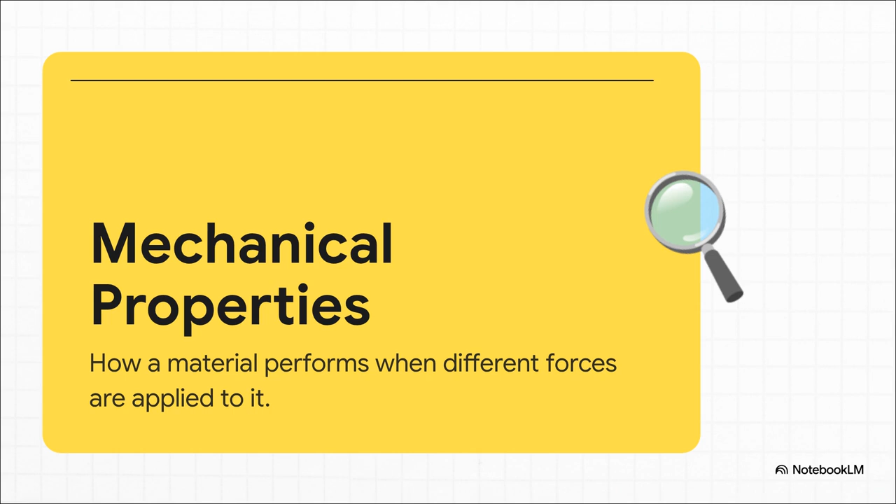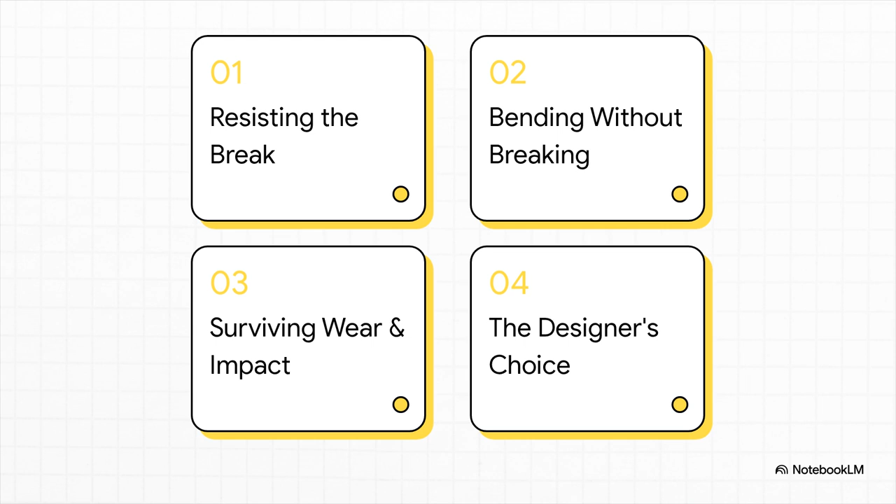So to really get a handle on this, we're going to break it down into 4 parts. First, we'll look at what it actually takes to break something. Then we'll get into how things bend and change their shape. After that, we'll see how materials survive all the wear and tear of daily life. And finally, we'll see how designers and engineers put all this knowledge to work.

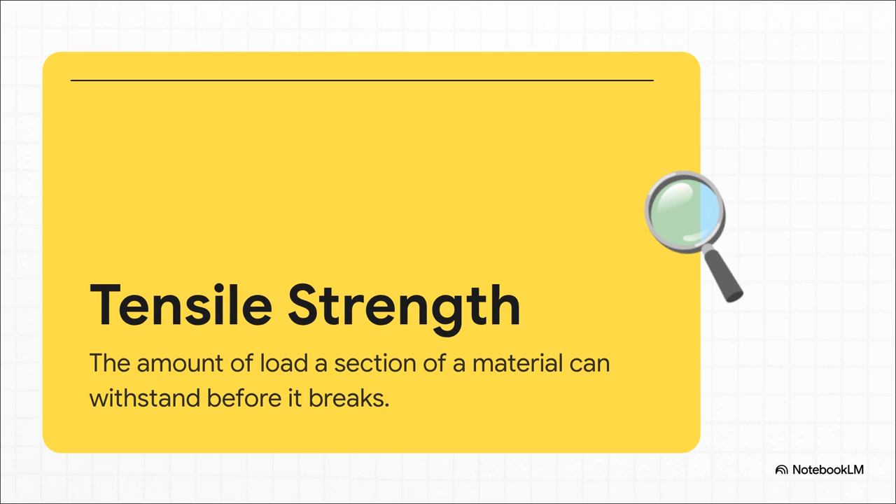All right, first step, resisting the break. This is all about the ultimate limits. We're talking about how much a material can possibly take before it just fails completely. Let's kick things off with tensile strength. I want you to picture a game of tug of war. Tensile strength is basically just a measurement of how hard you can pull on that rope right before it snaps in two. It's the ultimate test of a material's ability to just hold itself together when it's being pulled apart.

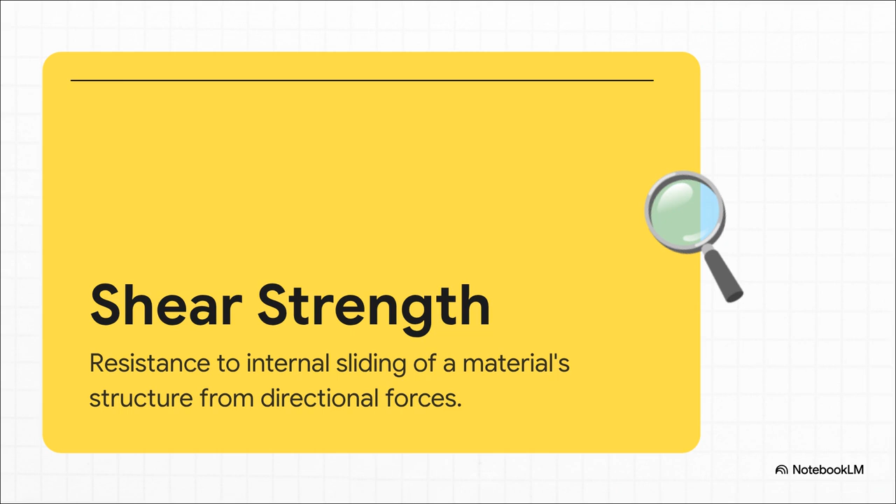Okay, next up is shear strength. This time, think about a deck of playing cards. If you push the top card sideways, the whole deck kind of slides and comes apart, right? That's shear. So shear strength is a material's ability to resist that internal sliding. And this is absolutely critical for things like bolts and screws, which are always dealing with that kind of slicing force.

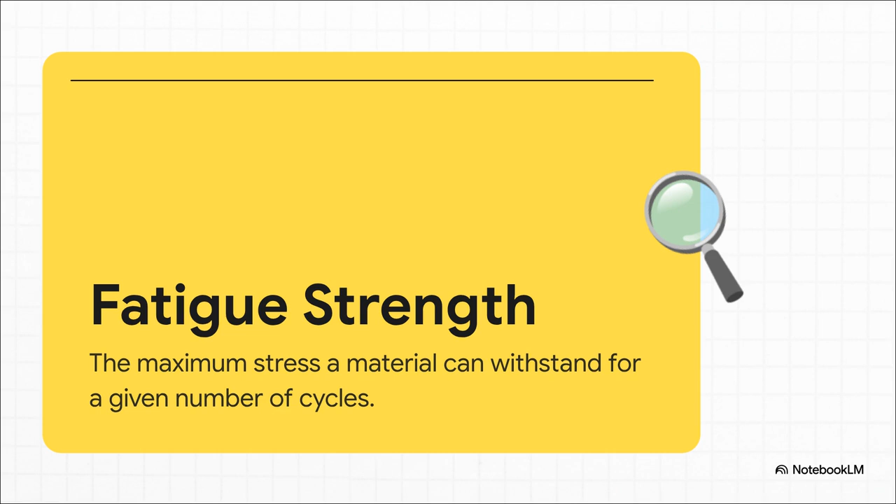Now, strength isn't just about one big, single event. It's also about endurance. And that brings us to fatigue strength. Remember our paperclip from the beginning? If you bend it back and forth in the exact same spot, it gets weaker, and then eventually, it breaks. That's fatigue. This property tells us exactly how many of those repeated cycles a material can handle before it gives up.

So we've talked about things breaking, but what about what happens before that? What about just bending? This is the story of how materials deform, and more importantly, whether that change is just temporary or if it's permanent.

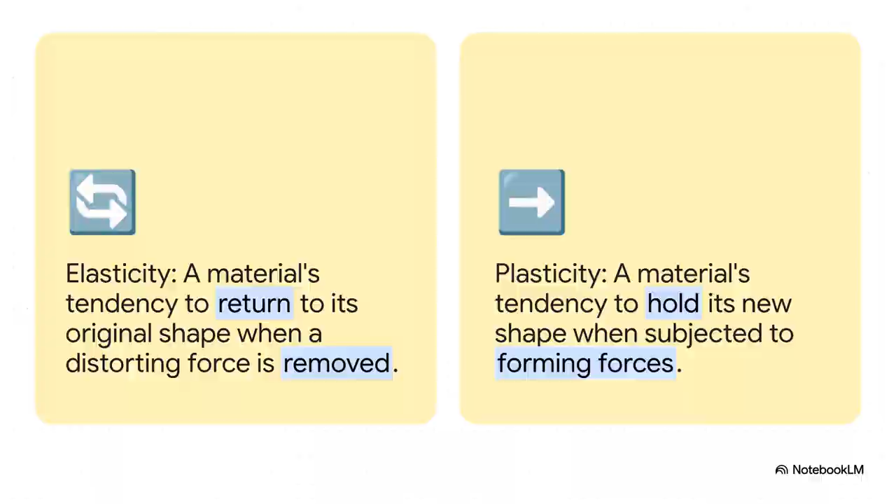Okay, so if a material can be both elastic and plastic, where's the dividing line? What's the tipping point? Well, that line is called the yield strength. It's the literal point of no return. Push a material just a little bit, it's elastic. But push it past its yield strength, and now it's plastic. It has changed its shape for good.

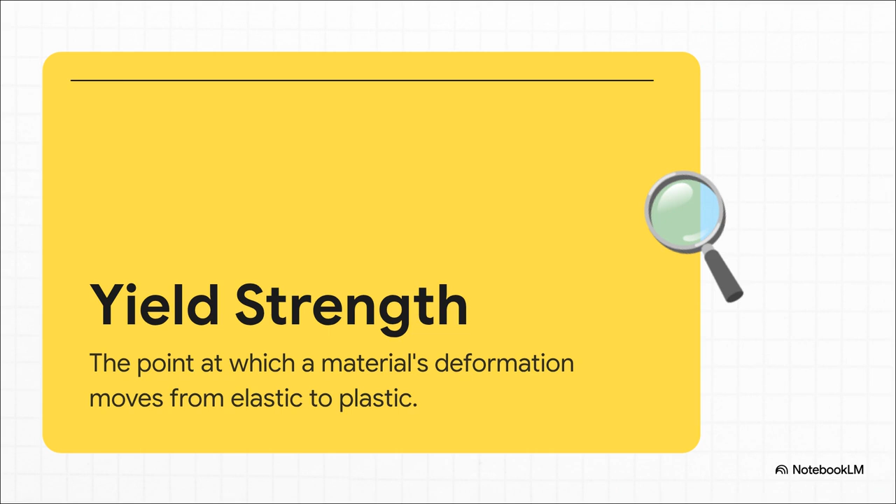Let's walk through that little journey from elastic to plastic. First, you apply a little bit of force, and the material bends elastically. Easy enough. Then you remove that force, and poof, it pops right back to how it was. But if you push it past that yield point, you get plastic deformation.

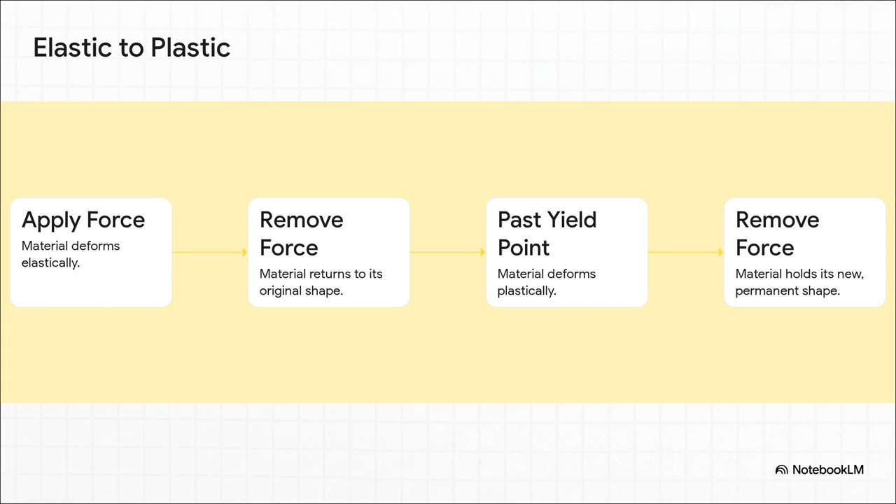And now, when you let go, the material holds on to that new permanent shape. You've officially reshaped it. Now, plasticity actually comes in a couple of different flavors. One of them is ductility, and ductility is all about stretching. It's a material's ability to be pulled and drawn out into a long, thin shape without snapping.

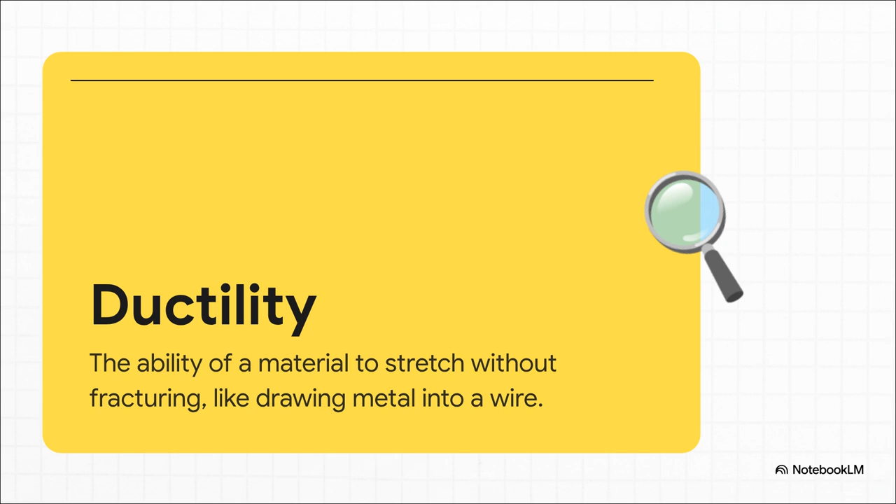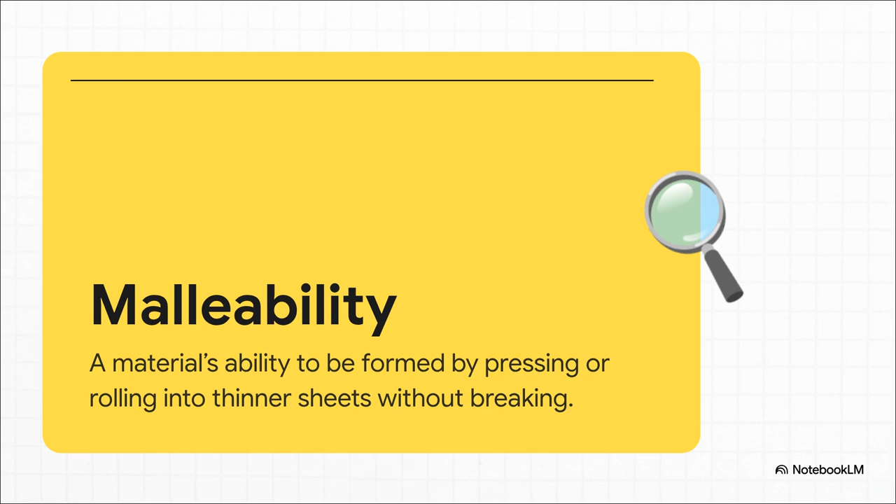I mean, the whole reason we can have those incredibly fine copper wires inside all our electronics is because copper has amazing ductility. And then you've got malleability, which is kind of like ductility's cousin. So instead of being pulled, a malleable material can be hammered or pressed or rolled into a super thin sheet without shattering. Gold and aluminum are famous for this. Think about gold leaf or even just a simple sheet of aluminum foil. That's malleability in action, right there.

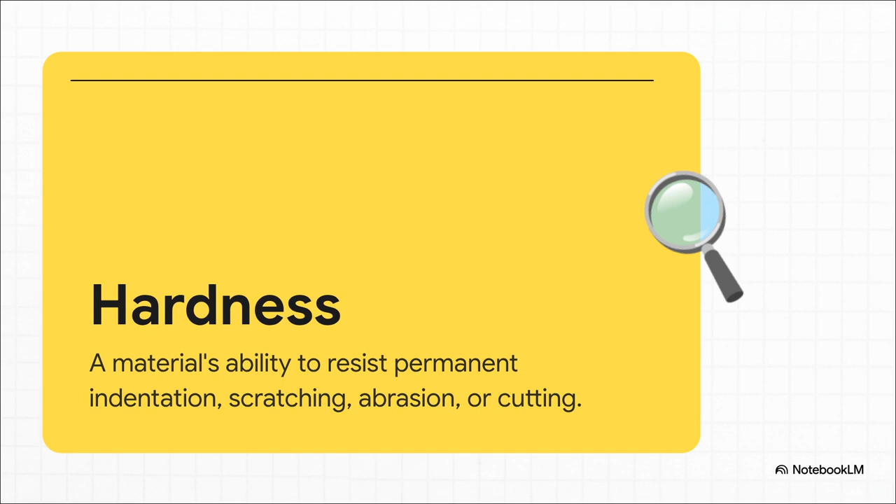Okay, so we've covered pulling and bending. Now for section 3, surviving wear and impact. This is all about how materials hold up against the scrapes, scratches, and sudden blows they have to face in the real world. The first line of defense here is hardness. This is a material's ability to fight back against being scratched or dented or worn away. A diamond is incredibly hard, right? That's why it can cut glass. Your phone screen is specifically designed for hardness so it doesn't get all scratched up by the keys in your pocket.

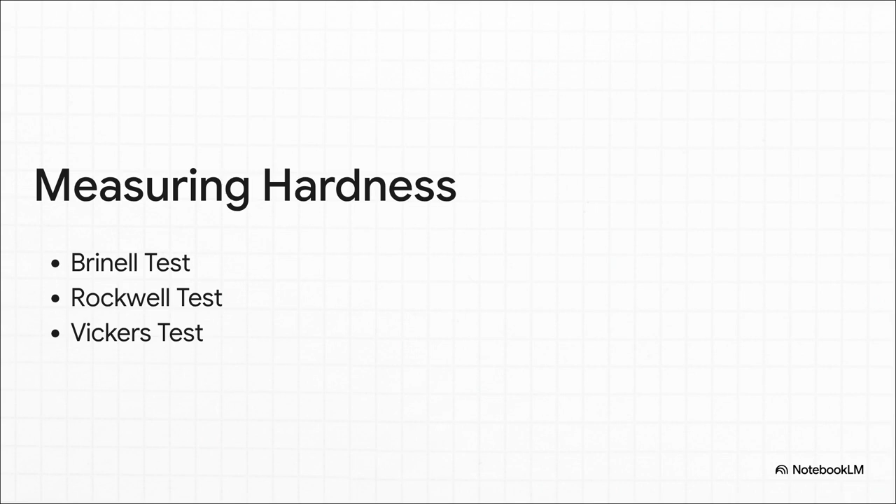And we don't just guess how hard something is. It's all very precisely measured using these standardized tests. You can see a few of them here, like the Brinell, Rockwell, and Vickers tests. They all work on a pretty similar idea. You take a super hard object, you press it into the material's surface, and then you just measure the size of the dent you left behind. The smaller the dent, the harder the material. Simple as that.

Now listen up, because this is a big one. Do not confuse hardness with toughness. They are totally different things. Toughness is not about resisting a scratch. It's about absorbing a sudden, powerful hit without shattering into a million pieces. A ceramic plate might be very hard, but it's not very tough. You drop it, it's gone. A car bumper, on the other hand, is designed to be really tough.

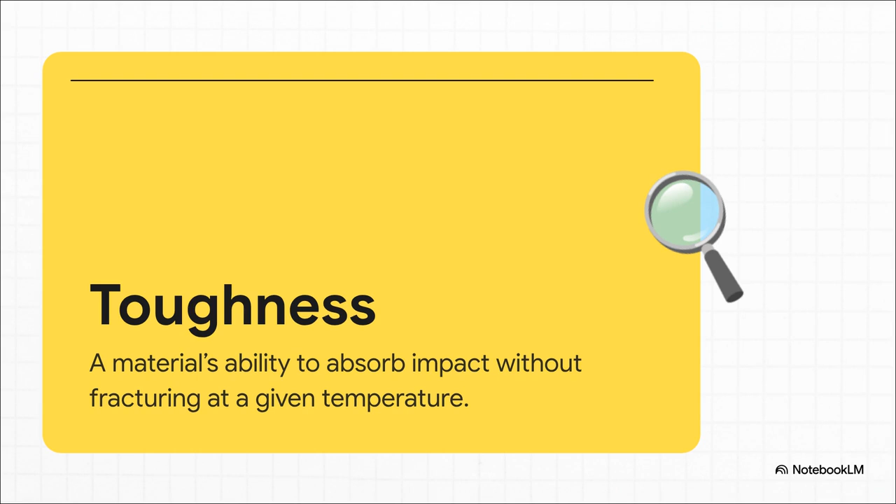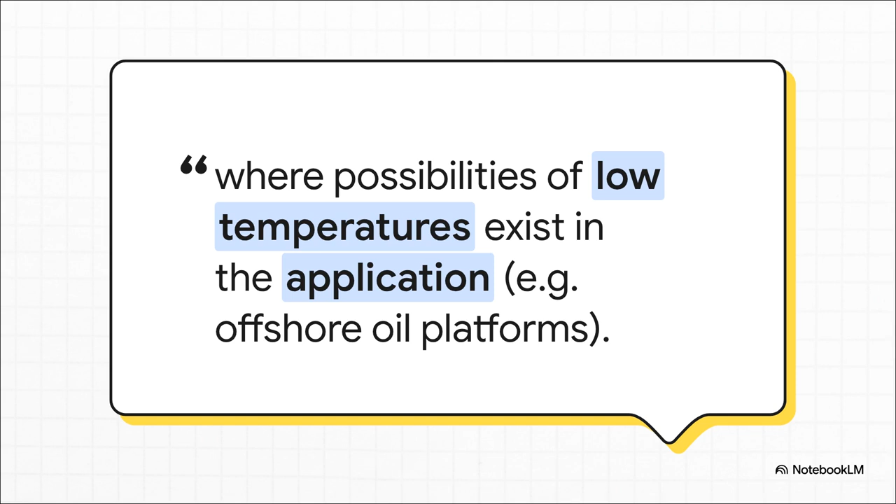And toughness becomes even more critical when you're in extreme environments. Why? Well, because cold temperatures can make a lot of materials dangerously brittle. So for something like an offshore oil platform way out in the Arctic, the steel has to be incredibly tough to handle those icy waves and impacts without just cracking apart. In situations like that, toughness can literally be a matter of life and death.

Okay, so we've got strength, plasticity, hardness, and toughness. What is the point of knowing all this stuff? Well, in our final section, we're going to see how it all comes together. For an engineer or a designer, these aren't just vocabulary words. They are a palette of options for building our entire world.

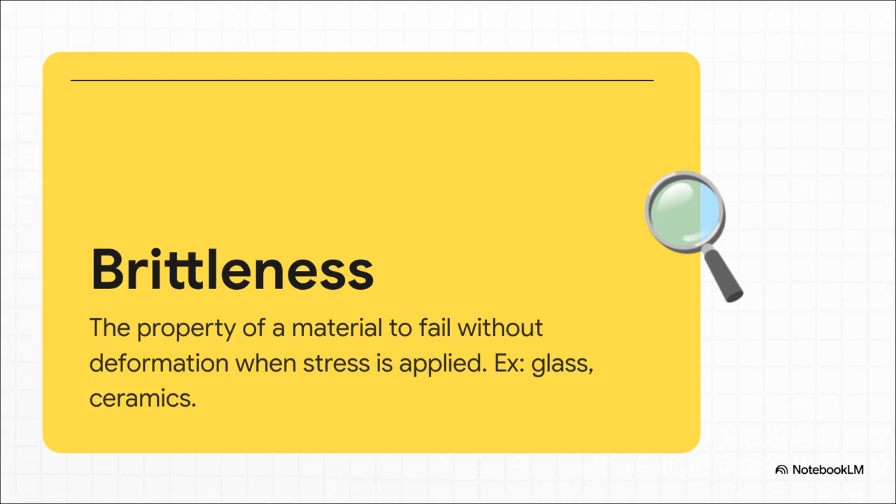And there's one more crucial property in that palette: brittleness. This is basically the exact opposite of ductility and toughness. A brittle material like glass or ceramic, it fails suddenly. It doesn't stretch, it doesn't bend, it just shatters. No warning. Sometimes that's actually useful, but a lot of the time it's something engineers have to be very careful to design around.

And this really brings us to the most important takeaway of all. Every single object in our world is the result of a choice. An engineer had to look at the job that object needed to do and carefully balance all of these properties. A kitchen knife needs to be hard so it can hold a sharp edge, but not so brittle that it shatters. A bridge cable needs immense tensile strength and fatigue resistance. It is always a complex, fascinating balancing act.

By understanding this language of materials, we can literally build the world around us. So now that you have the vocabulary, strength, toughness, plasticity, hardness, take a look around you and think about the future. What are we going to build, and what materials will we choose to do it?